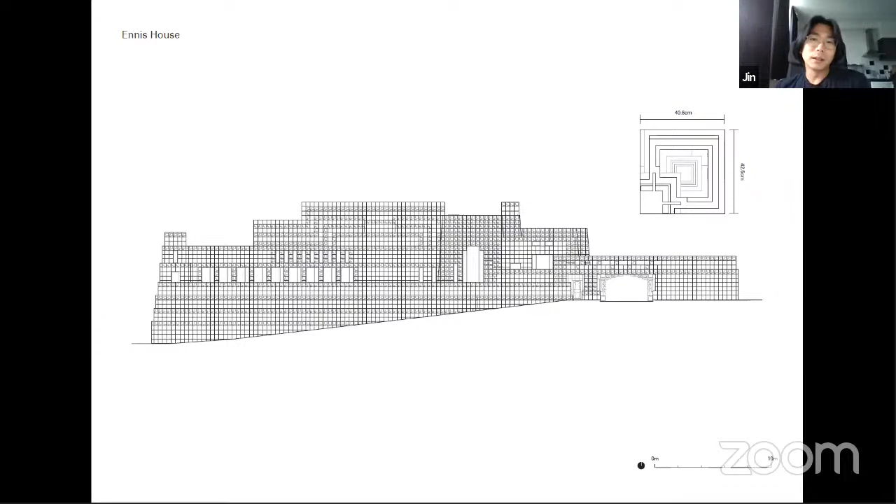To the architects, you might recognize this as a work by Frank Lloyd Wright. This has become a staple in the film industry, and what makes it so usable as a film site is this particular tile that is inspired by Mayan architecture, but it has this strange, ambiguous, yet unique identity to it that allows it to be

used in all sorts of films, from horror to representing a Hong Kong mansion or even the future. And to a film buff, you might recognize this space as the house from Blade Runner, which is what it's become most known for. And with the release of the new Blade Runner, this house was just recently sold for 15 million euros, the most that's ever been paid for a Frank Lloyd Wright building.

And even within this neighborhood that is in a very wealthy part of LA, it's far beyond the price of any surrounding buildings.

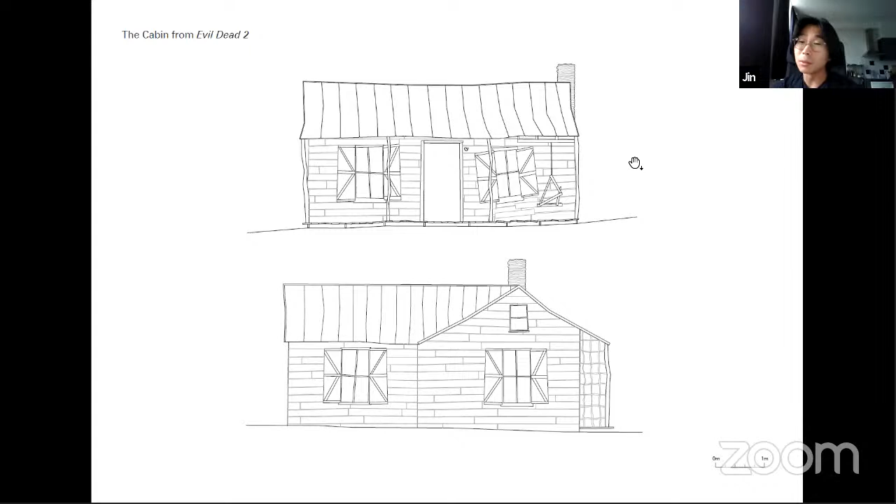And another way that film has influenced the type of buildings we see and their value is through the film The Evil Dead, which has led to similar types of buildings being preserved and put up on websites as film locations. So this leaning barn that really should just be taken down is being kept up and used as a film site in someone's backyard.

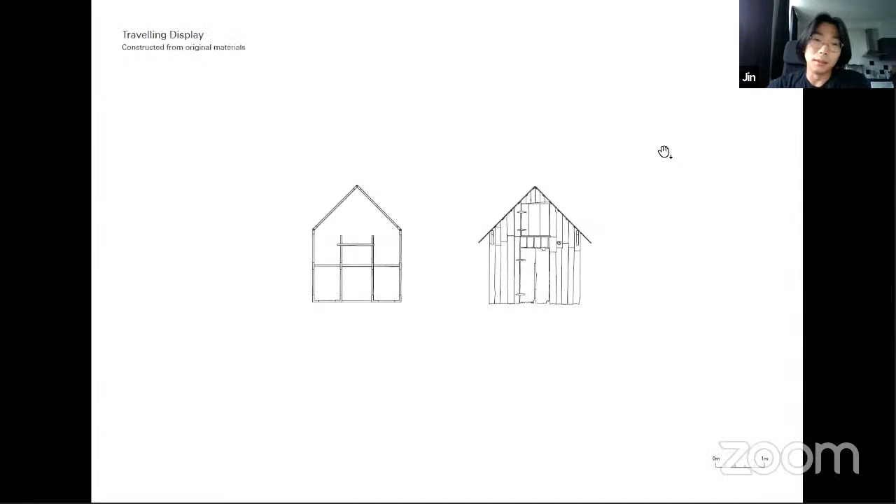Another particularly interesting part about this case is that even the building materials themselves gain value because of the film. So fans of this Evil Dead film started collecting them, and this is a traveling display that they put up at road shows and so on.

However, you can also buy the materials that were shown on film. This has led to 207 times the value of the average price of roofing, 67 times for the glass, and 46 times the price for a wood plank. If this continues with these kinds of numbers, I think soon everyone will be sourcing FSC materials for their building projects in the future.

Let's move on to the Vanishing Act.

So after moving on from the cinema, we're here to question the context. So what about the context? Because the value of real estate has been location, location, location since time immemorial. And it's that ethos that enforces a fear that a new building addition may actually destroy the location itself, or even worse, decrease its value. And therefore benefiting from the location, at the same time, runs an inherent risk.

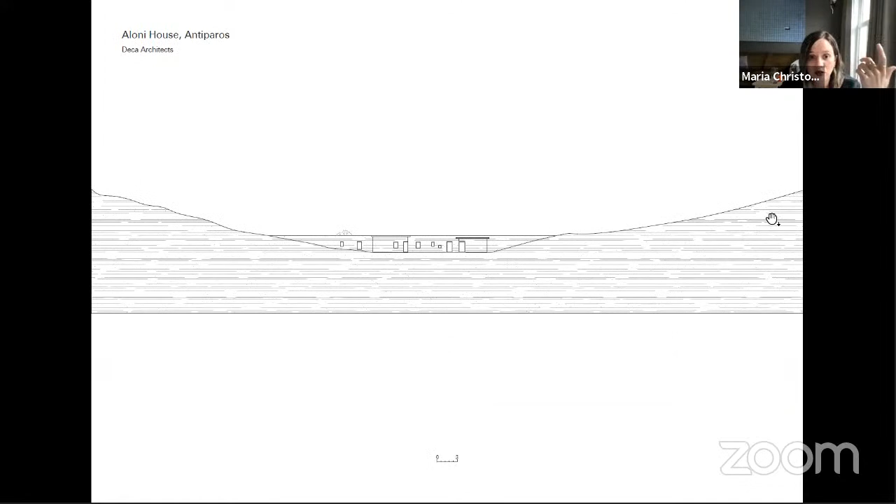Vanishing is just one way of relating to the context, but the value, especially in this case, is not determined by the object, nor by the concept, the context, but by this mutual dynamic relation that is being built up between them.

Here we can see the Aloni house in Antiparos, where it's a building built between two slopes. Actually, the interesting thing is this is part of the Oliaros development, and it was one of the first couple of houses built there. After that, around 10 years ago, the land values rose 3 to 5-fold.

And also on top of that, the government now awards bonuses to developers that top their buildings with earth in a similar way.

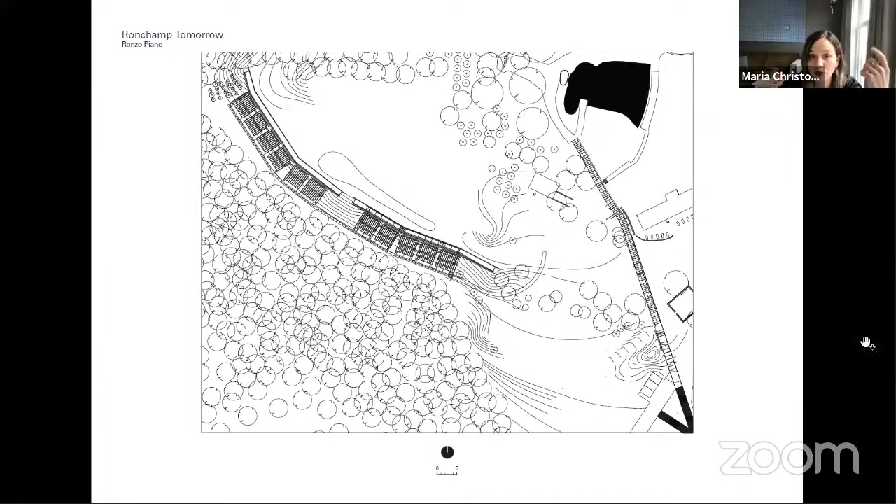Moving on to Ronchamp Tomorrow by Renzo Piano, where although it's only 300 feet away from Le Corbusier's church, Piano decided to cut into the slope so as not to intrude on the presence or setting of this iconic building that stands there.

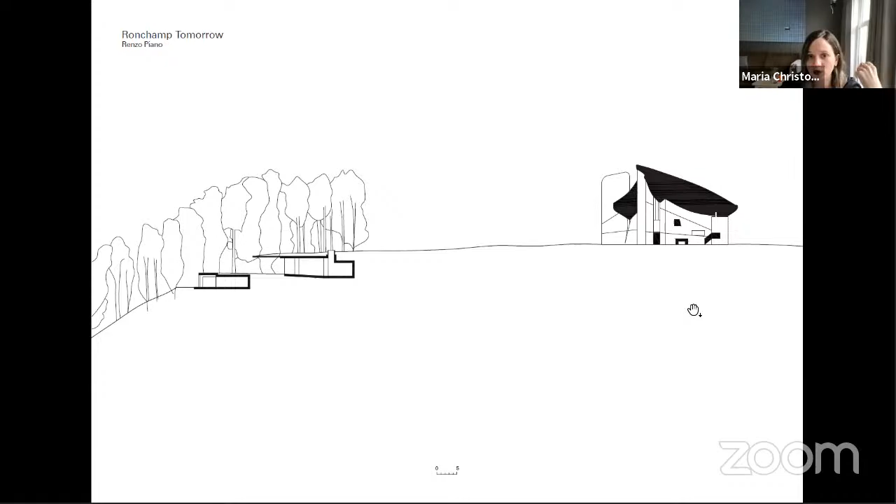The interesting thing about this building is that we have a new addition that camouflages itself into the landscape, as we can see here, but it's not to preserve the landscape per se. It's really to not interrupt the presence of this iconic element that already stands there.

Also, sometimes vanishing can also be an extractive art, where we keep deriving value out of something existing, even though sometimes we may not have anything to add to it.

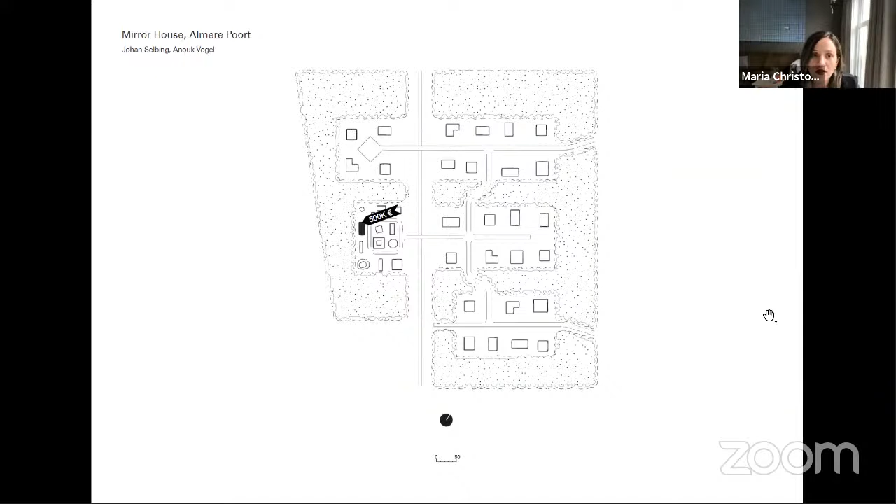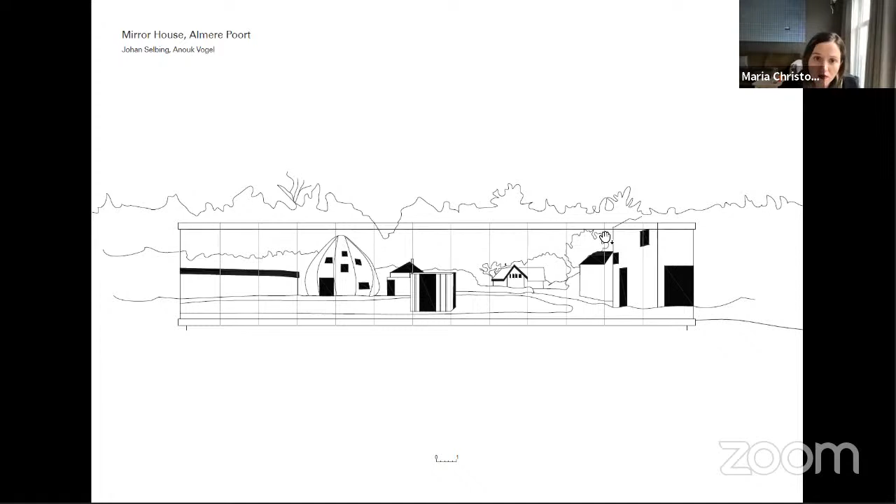The interesting thing about this building, which mirrors its surroundings, is that whereas the Almere Poort price per square meter is around 2,500 euros and the Amsterdam price is more than double, after this building the Almere Poort price has risen to almost 5,000, really close to the Amsterdam price per square meter, just by creating this relationship with the context.

The brief of the competition called for an individual house with a strong relation to its surroundings, really.

One can question when these buildings are trying to blend into the context, right on the boundary of imitating, disappearing, and actually generating a caricature. When is this fine line between disappearing and caricaturing crossed?

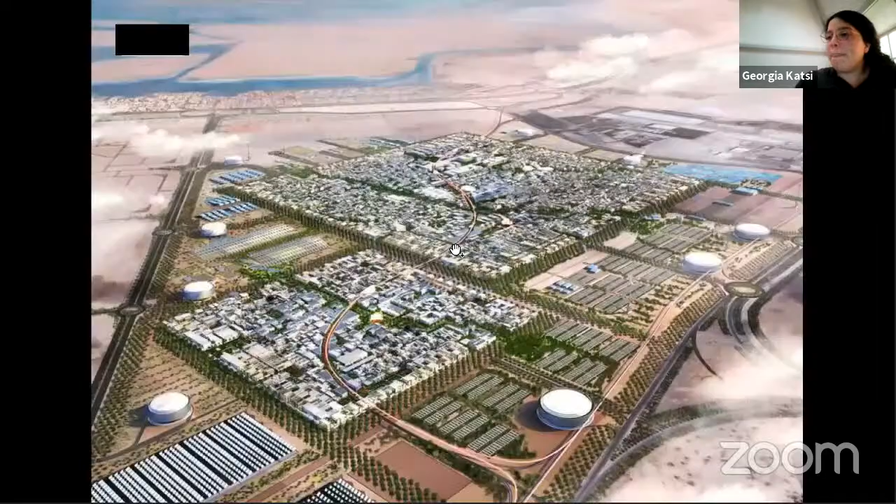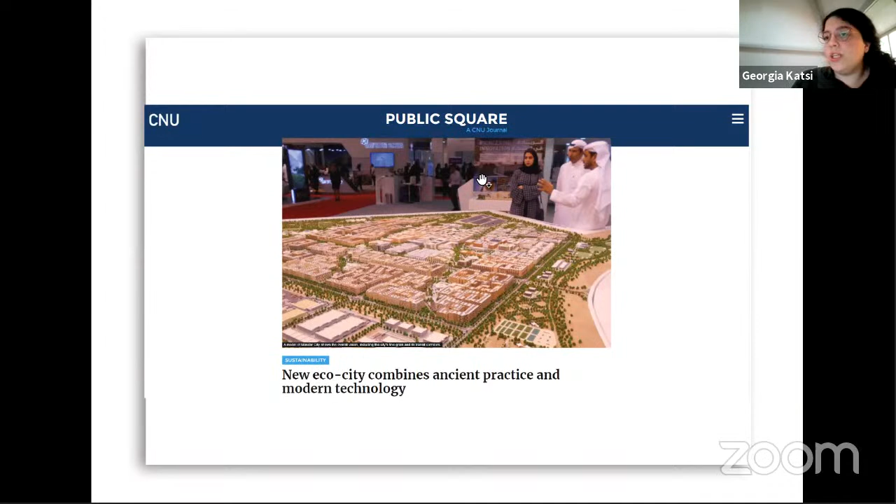Masdar City, a 6 square kilometer city for 50,000 people, designed by Foster, promised to be the new eco-city that combines ancient practice and modern technology, a rising star that sees growth rate accelerate.

King Abdullah Economic City in Saudi Arabia, a 181 square kilometer city for 1.7 million people, promised to be Saudi Arabia's new desert megacity, a new manufacturing and logistic hub for Saudi Arabia that generates a new era of prosperity.

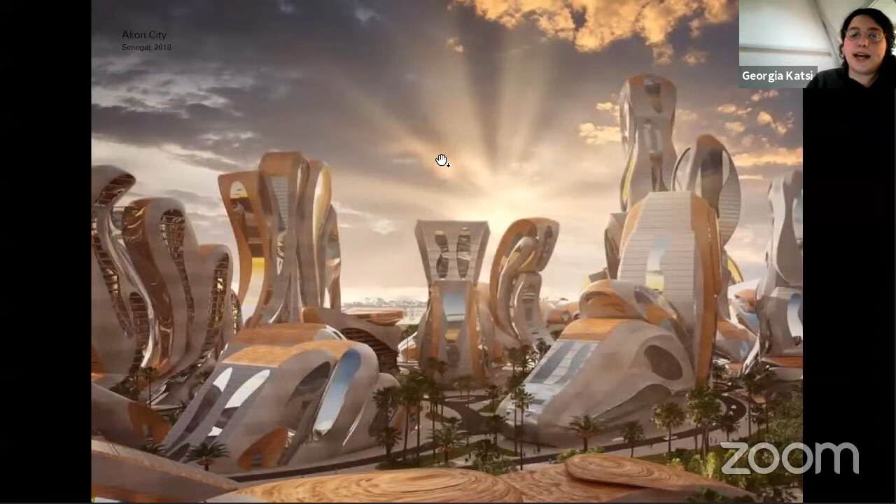Akon City, a coastal village 100 kilometers from the capital of Senegal, sponsored by the Senegalese singer Akon, promises to address the need for vibrant new community development. It was officially inaugurated in 2020, and promised to be powered by cryptocurrency, resembling the fictional African city in Marvel's hit movie Black Panther, a real-life Wakanda.

But where is the construction? Is construction really necessary, or can economic growth be seen, or can it be replaced by image and rumors? So now we are going to investigate 3 examples.

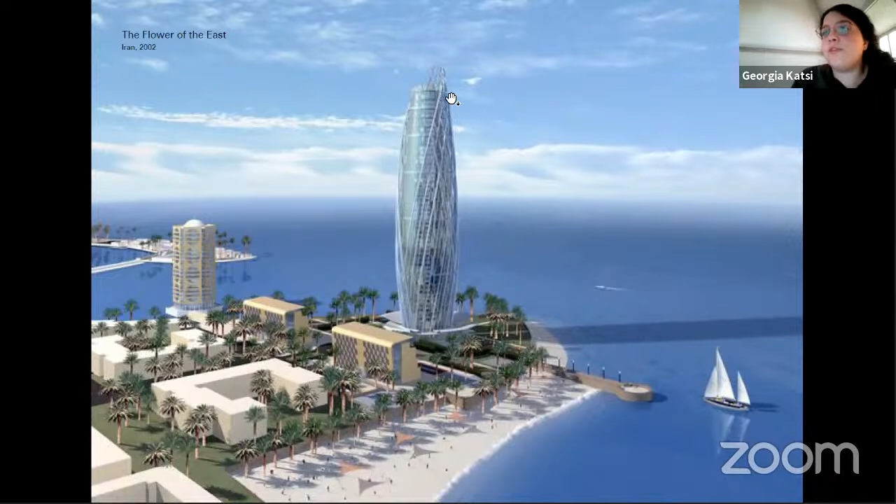The Flower of the East is the first one. It was a project launched in 2002, part of a large contract called Gulf Shark, which was to attract investment from foreign companies. Here, President Mohammad Khatami at the World Economic Forum in 2004 announced liberalizing investment regulations and foreign direct investments.

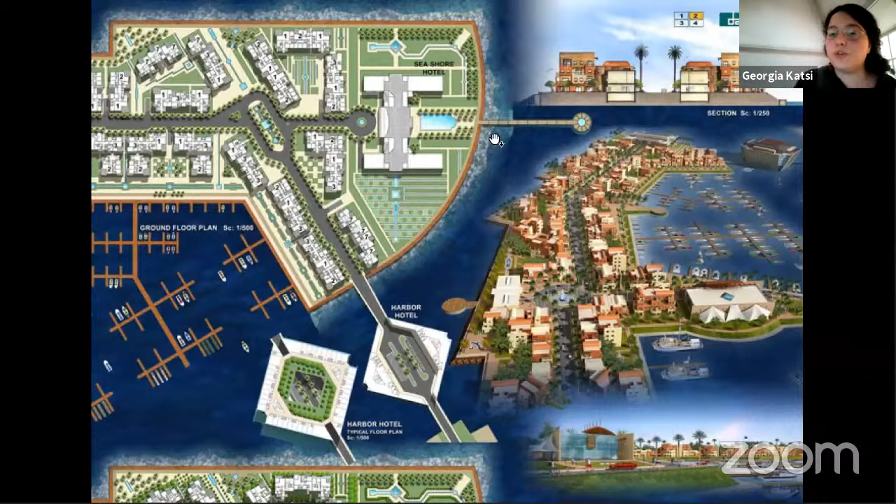The agreement comes with a German developer company that buys the land for 600,000 euros, and promises that the 2 million square meter land will attract 3.8 billion euros. The project was slated to include 3 hotels, 3 residential areas, villas and apartment complexes, coffee shops, showrooms, stores, sport facilities, and a marina. The centerpiece of the project is a hotel in the shape of a flower, a combination of Persian and modern architecture.

Although the project was cancelled in 2007, the news reported the same year that it had already attracted 3.8 billion euros. And in 2011, we see that the second 7-star hotel is ready to open its doors in Iran. But in reality, the land remains empty.

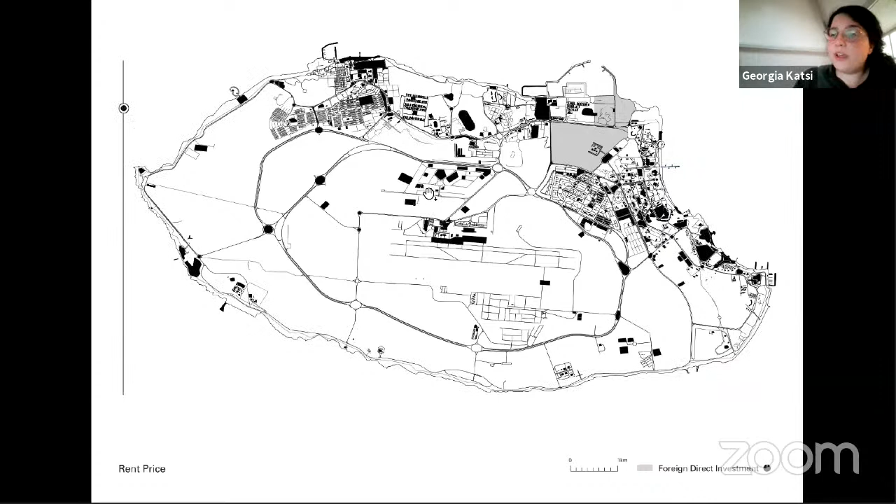And although it remains untouched, we see that the surroundings are being developed, and in particular constructed and delineated the gray zone, which is the development. The rent goes from 65 euros in 2003 to reach 190 euros.

Then we have the Eco City in Dongtan, close to Shanghai, to house 500,000 people and suggest a city with hopes of being completely carbon neutral. In 2005, the Shanghai Industrial Investment Corporation hired a global design engineer and business consultant company.

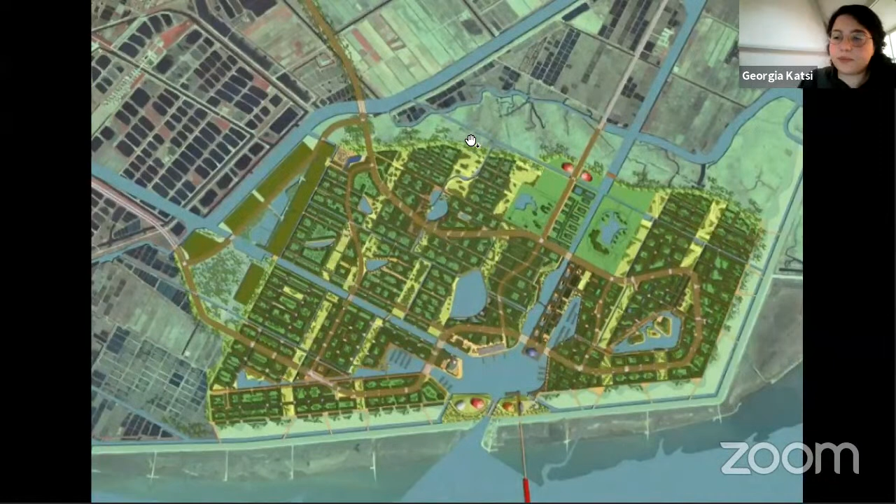Dongtan will be energy self-sufficient with all its transport, residential and commercial buildings powered by a combination of wind, sun and other renewable energy sources. Here we see the signing renders. It's going to be the first eco-city that China builds, a utopia of premature birth.

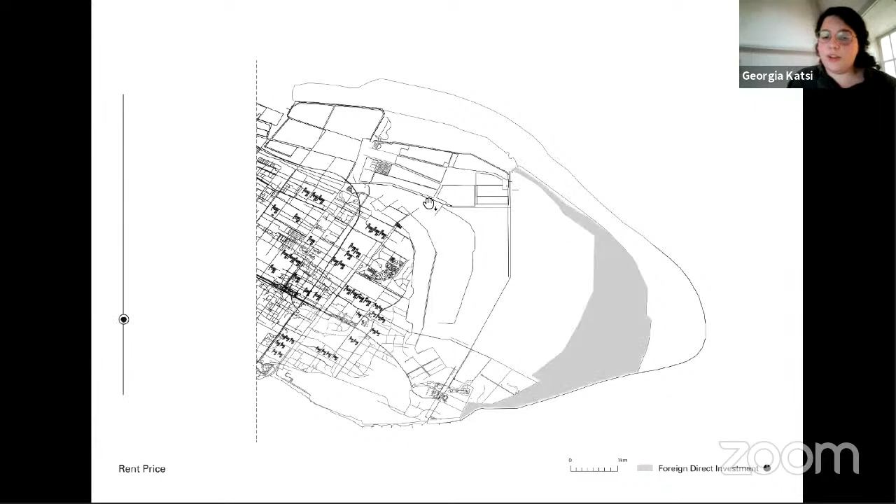The land in the beginning was mainly residential, and the rent price was around 32 euros on average. And although there were questions if Dongtan eco-city was ever meant to be built, or if it is just another example of greenwashing, the plot remains. And although the plot remains untouchable again, the development of the surroundings was profound.

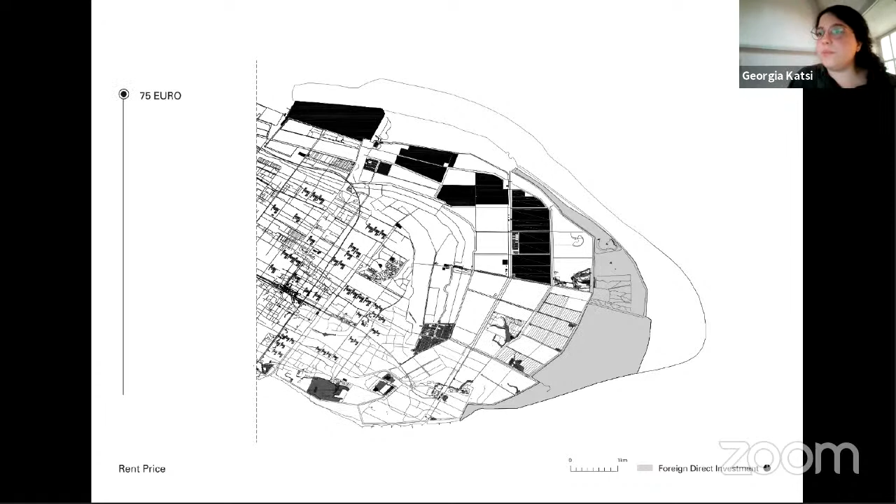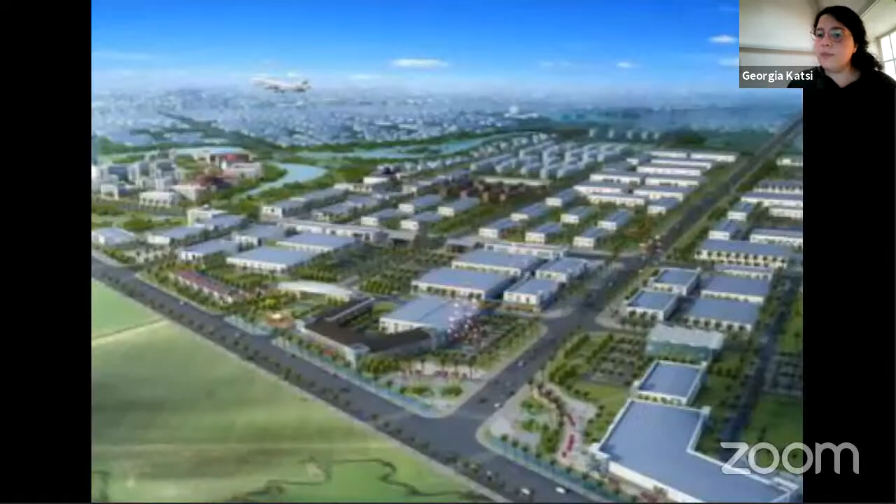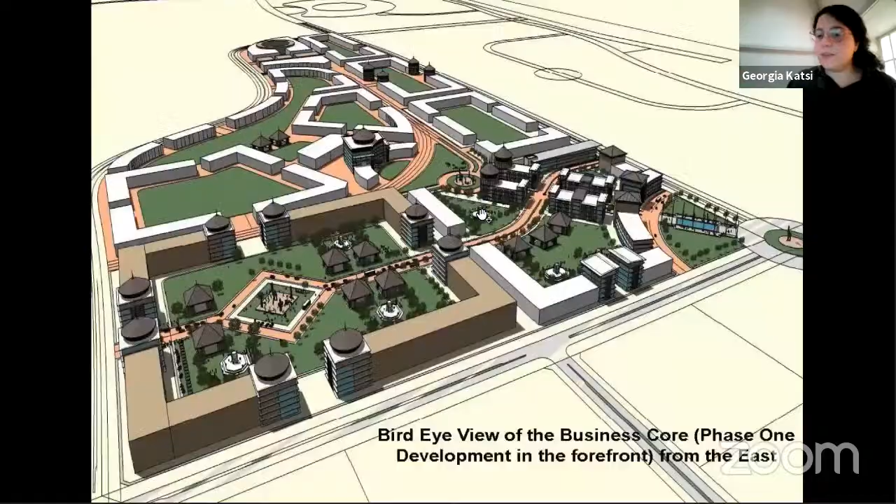The project was slated to include industrial zones, residential zones, commercial business core, and open spaces. Here we see a bird's eye view of the business core. And the news again praised that already in 2019, it covered all the investment it was supposed to.

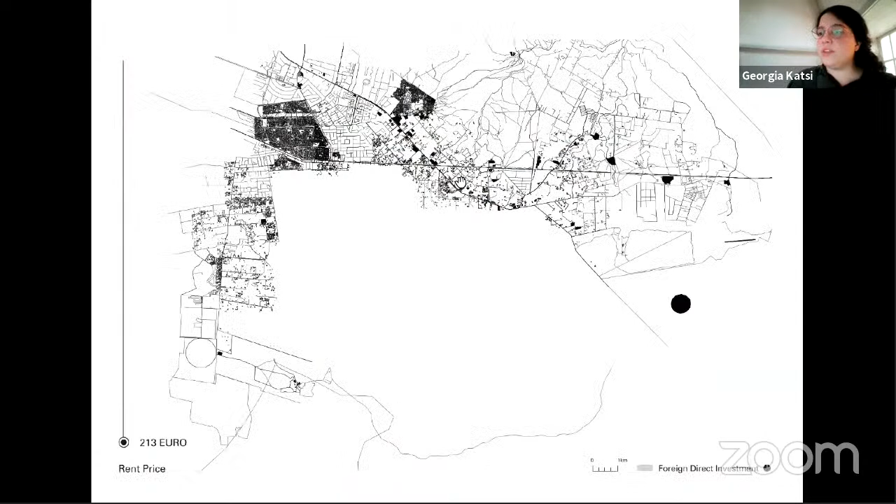And we see millions of tweets. However, the land remains untouchable, and again, we see the surroundings being developed.

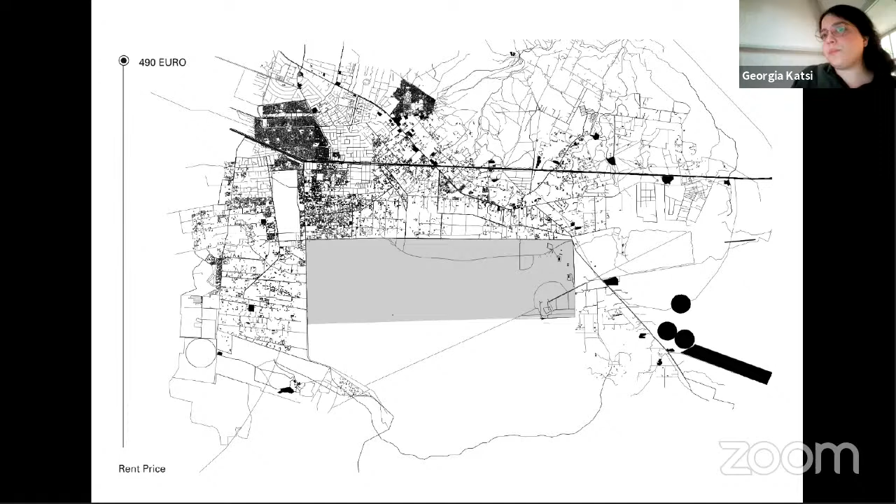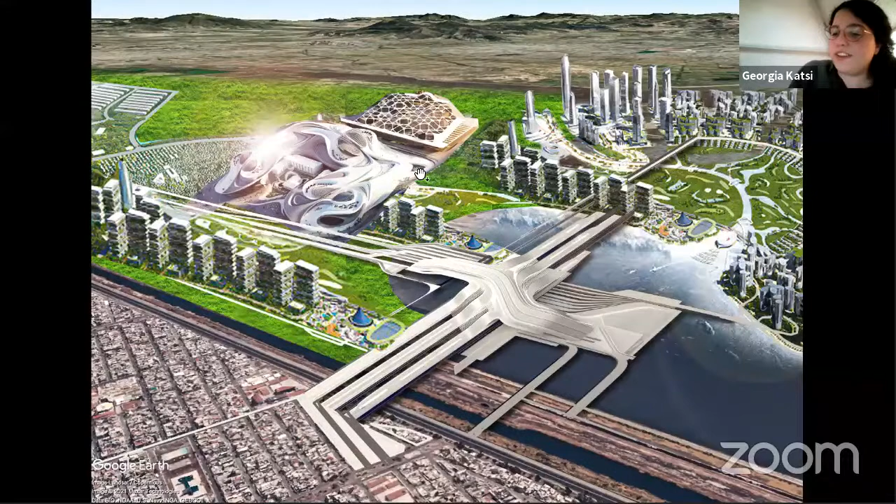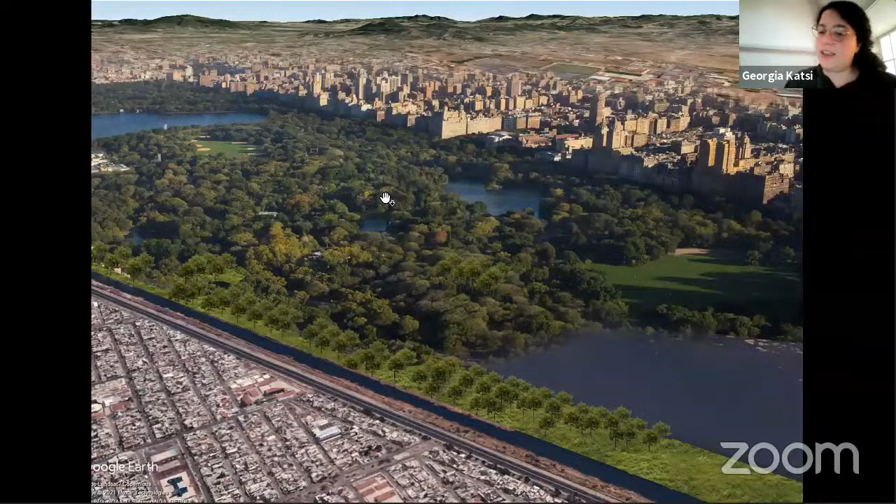And now the question is, what if these rumors could construct public spaces? So what if in Mexico, for example, in the Texcoco airport, we propose a multi-facility zone which communicates the dream of development in a shining image, but only in order to develop a huge park that is built only in the surroundings.

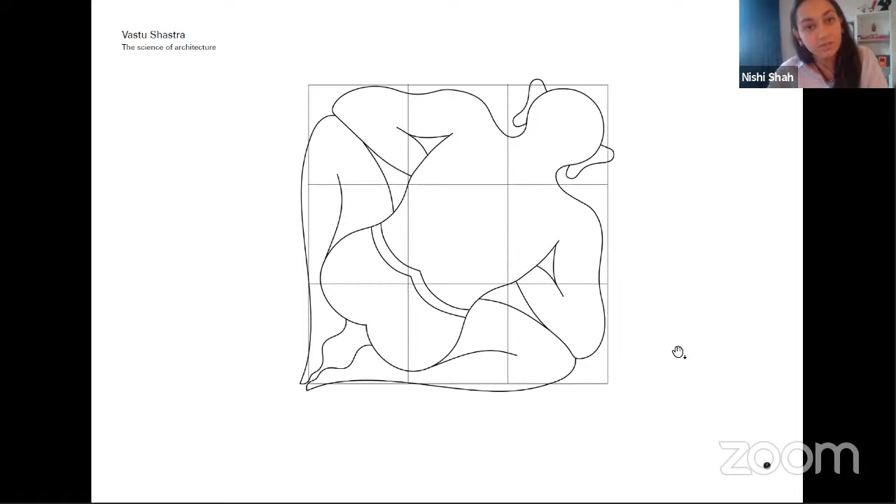Vastu Shastra is an ancient Indian system of architecture based on spatial geometry and directional alignments derived from a 9-square grid. The human embodiment in the diagram represents a cosmic man, and the design is developed from the flow of positive and negative energies, and was traditionally used for Hindu temples.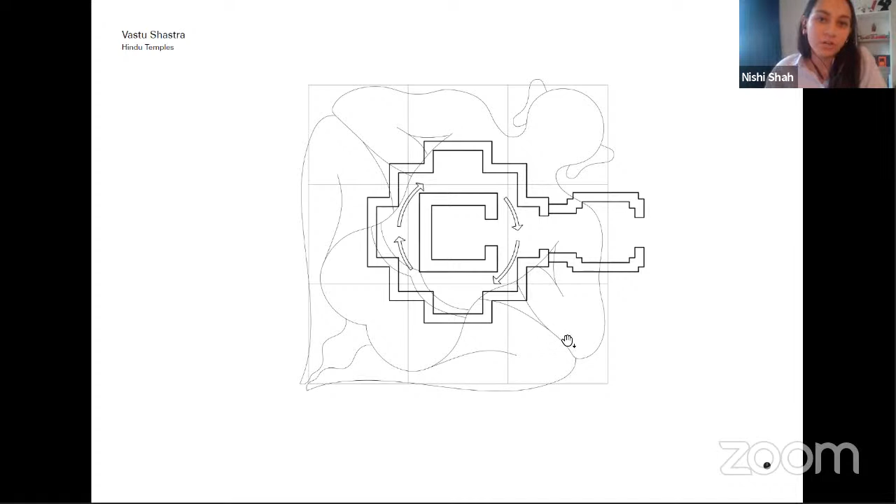The shape of Vastu is always orthogonal and remains a square, as it is believed to be the most perfect form of Indian architecture.

Modern adaptations led to the planned city of India, Jaipur, which was the first city developed completely on the logic of Vastu Shastra, where the street network and public squares are connected with each other, addressing that all things in the universe are always connected.

Similarly, modern era projects by architects such as Charles Correa and Le Corbusier have also incorporated modern architecture with the theories of Vastu Shastra.

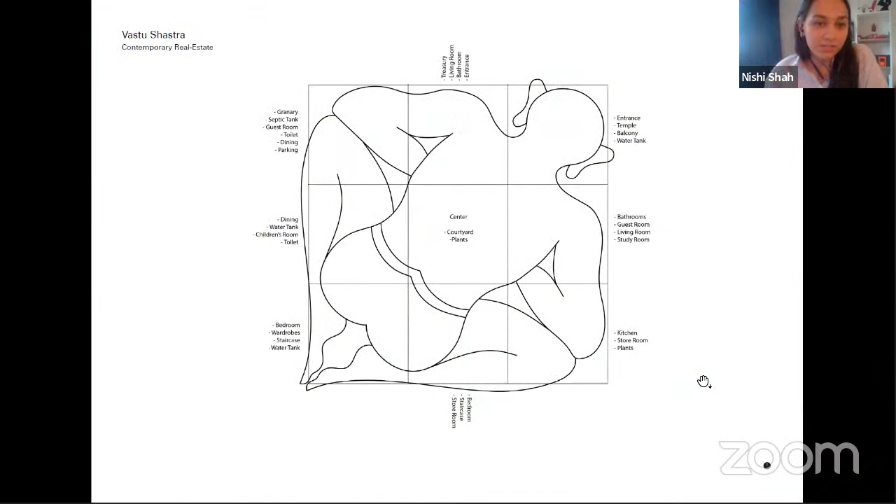Today, Vastu Shastra's divinity can even be incorporated in your homes. All you need to do is follow a few simple steps to Vastify your properties.

Step 1 is to find a property which has a street network towards the north, east, or northeast direction, as that's considered to be the most auspicious space. The slope in the property should always be sloping from the northeast to the southwest.

Considered to be the most important factor in a building, the entrance of the property should always be located in the northeast, as it represents the archway to prosperity. Water bodies should always be in the north, and the flow of water towards the east brings more financial benefits to the family.

The property dimensions should always follow a length to breadth ratio less than 1:2. Future expansion zones are only possible in the north and northeastern directions. The southwest should always be shaded by trees, as Vastu Shastra strongly believes in integrating with nature. And as mentioned earlier, it should always be orthogonal, so curves or angles are not good for Vastu.

The layout inside the building is also completely derived from Vastu, and even the colors are developed from the diagram of the Vastu Mandala. So these are the 11 steps that form the basic layout of a Vastu compliant property.

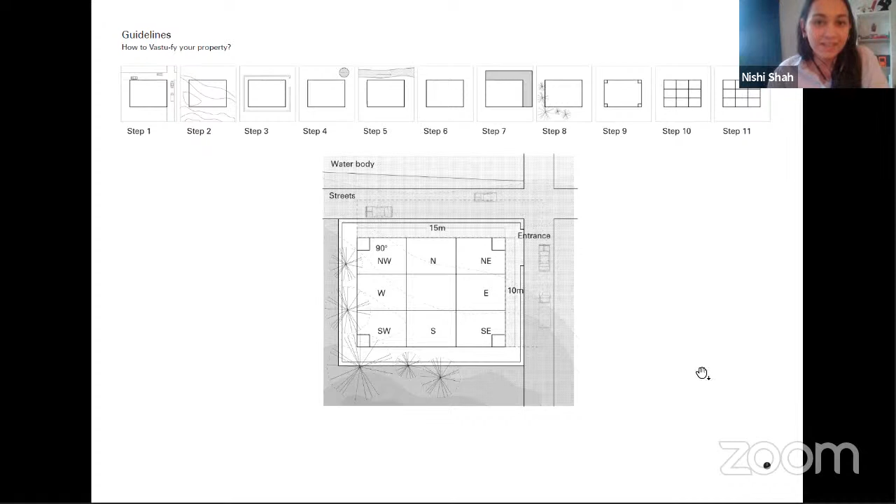Vastu provides the opportunity to have a plethora of examples, and it increases the life conditions of a family and solves the problems that these families have.

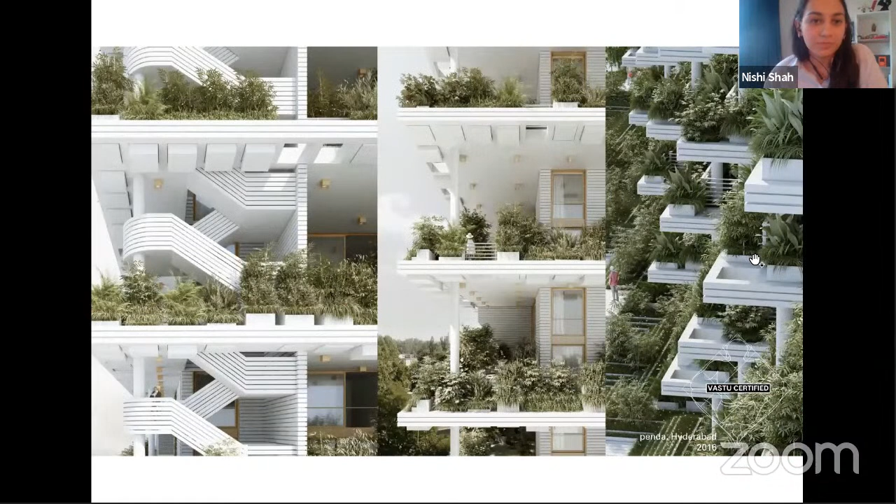Architects like Chris Precht and Norman Foster have designed Vastu compliant buildings in high rises, but to have a house designed by Khosla Architects or Matharu Architects, personally derived from your own horoscope, brings even more success in your lives.

It is also easy to use the laws of Vastu Shastra for all scales in architecture, from a unit level to high rises, or even a neighborhood scale. And Vastu Shastra is not limited by any design forms.

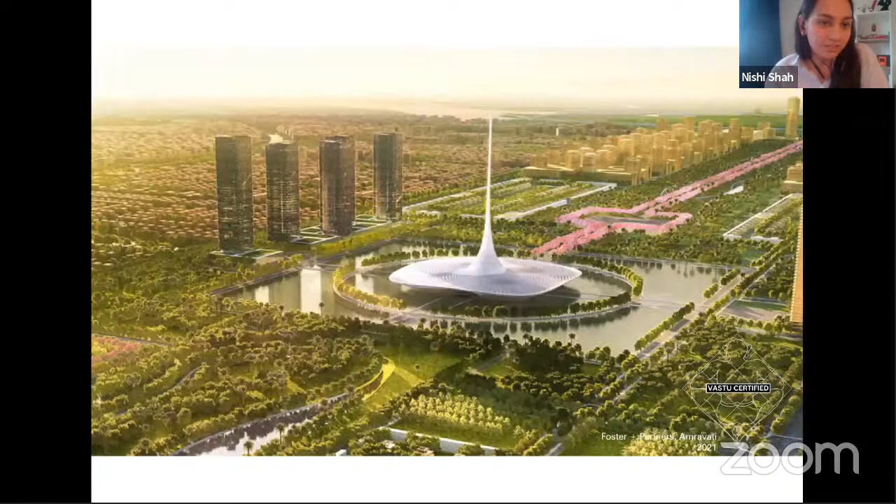The phenomena of Vastu Shastra today has become increasingly popular and is the new trend, and has become an important filter in real estate websites and property advertisements.

Architects and Vastu experts today are studied and well versed in the laws of Vastu because they give consultancy for their clients. They study their horoscopes and provide and modify layouts based on the horoscopes of their clients.

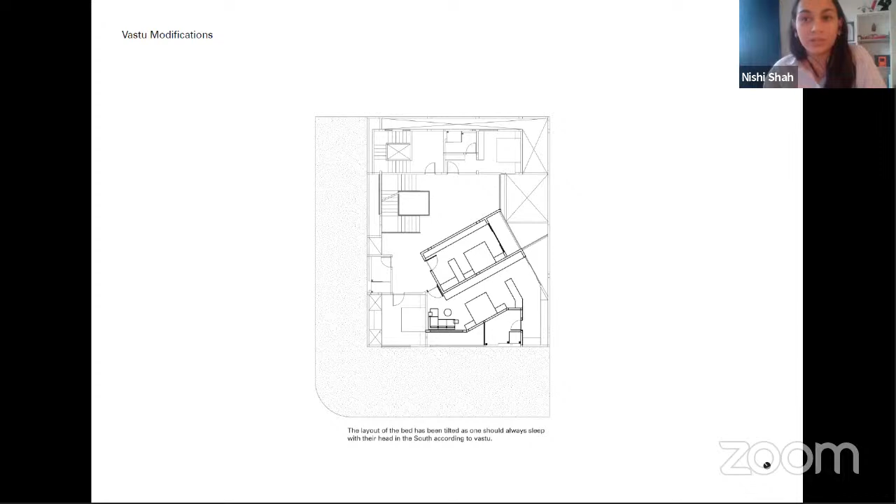It is very simple to design a new house, but it's even simpler to modify an existing house. All you need to do is shift or rotate a particular bedroom so that you always sleep with your head facing south, or just tilt the entrance porch so that the entrance arch faces the northeast direction, bringing an auspicious life.

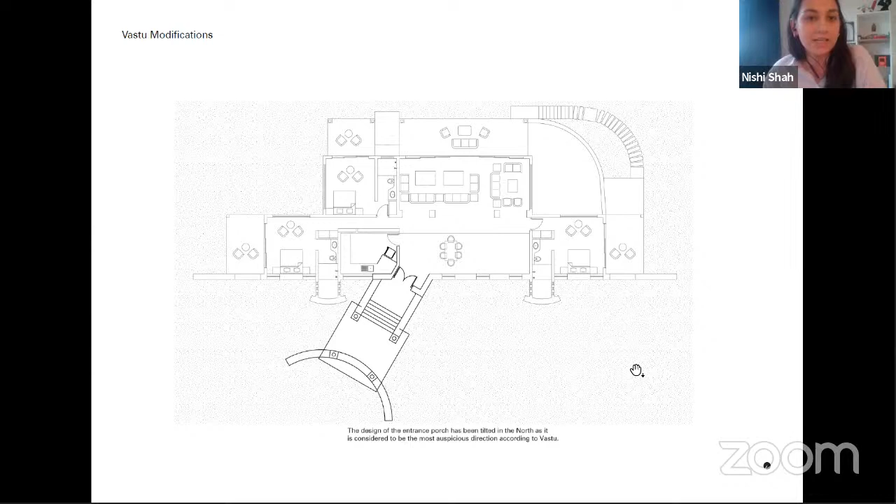Do you have a property that is currently facing maintenance issues or is abandoned and not inhabitable? All you need to do is consult a Vastu consultant, and with a nominal fee of 170 euros per session, he can provide modifications to your house and make it a much better place for living.

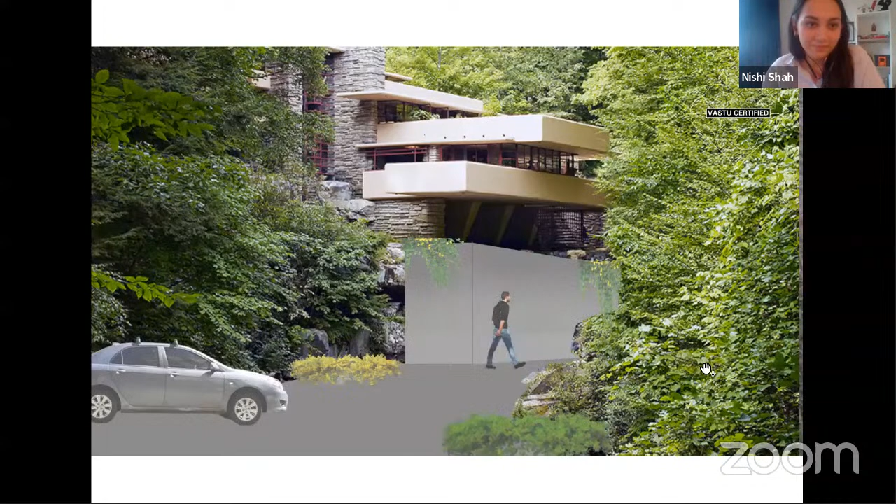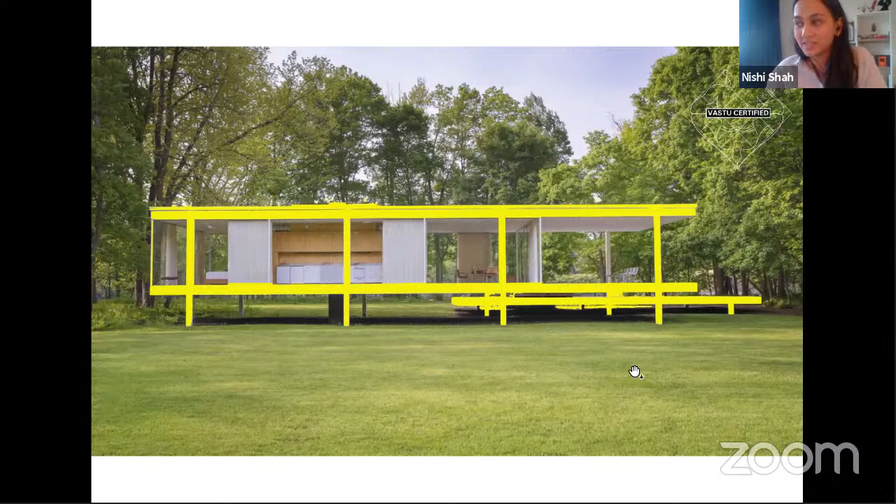Vastu is the future to mitigate all problems in architecture by simply believing in this miracle of the ancient science of building. The financial logic of architecture, subjugated by this real estate mutation, manifests completely on these beliefs, in turn shaping the architecture of contemporary India. Thank you.

And from India, we go to Denmark, where another type of wisdom stems from. I'll be presenting together with Ryan.

When Copenhagen announced it would pedestrianize their shopping street Strøget, they received criticism from motorists and business owners, claiming that the decline of traffic would be reflected in their revenue. Less traffic is less profit was their idea. They said, 'We are Danes, not Italians,' while creating a traffic jam in the streets as part of the protests.

At the same time, the architect Jan Gehl started studying Strøget and publishing about it. Slowly this model expanded throughout Copenhagen, using Nyhavn, and it expanded even to become a kind of model of pedestrianization over the whole world.

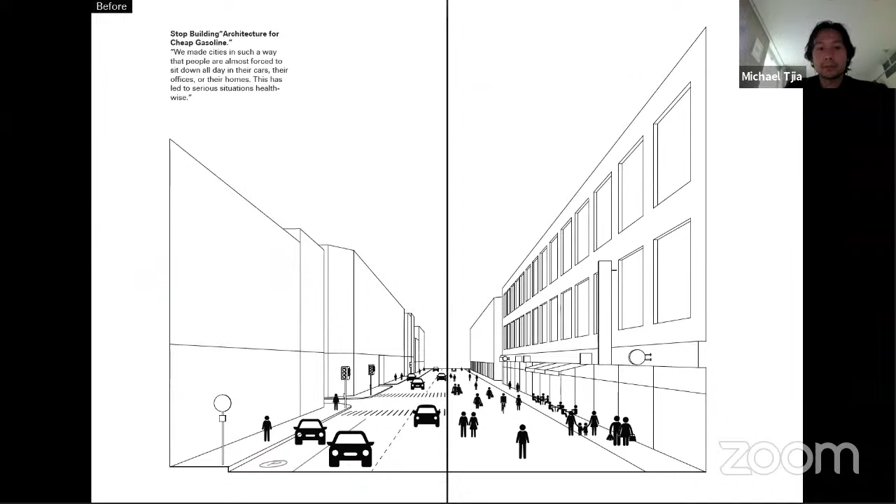How is Jan Gehl selling this? Studying this Strøget model and trying to give his strategy to promote this equitable and healthy city.

His strategy, as he says in his book, is to stop building architecture for cheap gasoline. To him, the car-oriented street is only beneficial for the auto industry. Therefore, we need to ban cars from the street and give more space for people to walk.

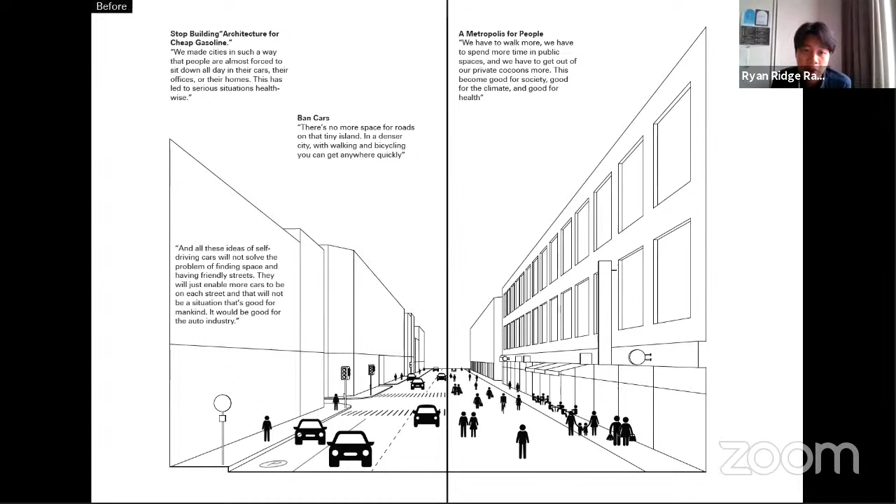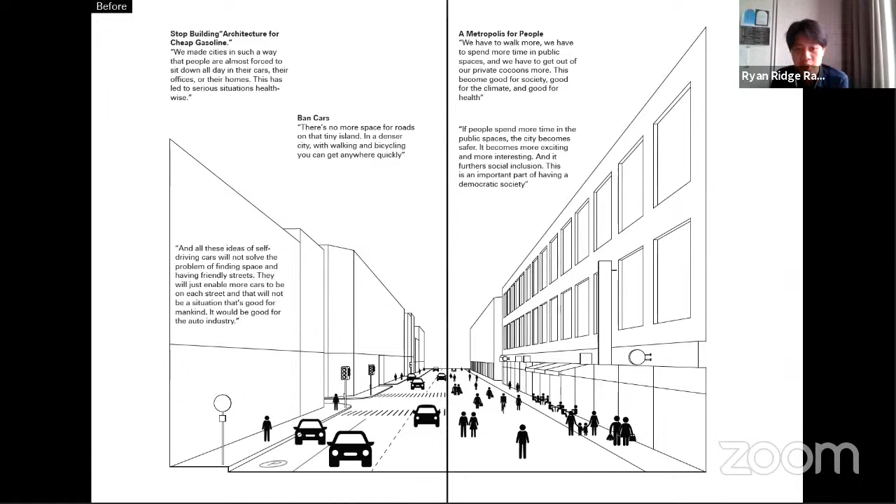This also promotes better climate, good for society, good for climate, and good for health. If people spend more time in public space, the public space becomes safer and more interesting, and it gives more social inclusion and a more democratic society.

Since the last decade, the city designed for the human scale has continuously been mentioned in all these livability rankings, such as those of The Economist, Monocle, and Mercer. But the real acknowledgement comes from Jan Gehl himself, stating that the Danes have become more Italian than the Italians.

So, of course, this also has its effect in real estate value. For instance, if we studied 3 types of streets: regular streets, shopping streets near a pedestrianized zone, and fully pedestrianized shopping streets, which are worth up to 16 times more than the equivalent type of property in a very different type of area. So what does this look like on the streets?

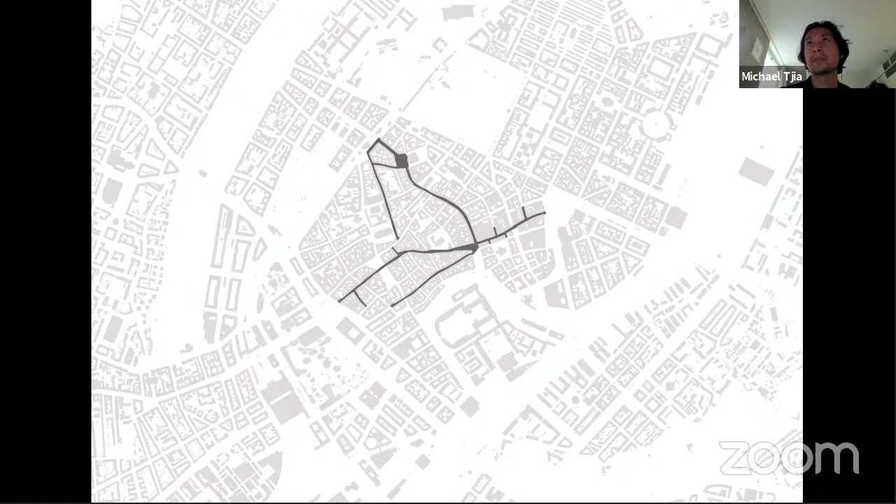Just in the context of Copenhagen, this includes the Strøget shopping area amidst, let's say, the historic context. And this is where it gets really interesting, where you can see the black flag price tags are the properties directly on the pedestrianized shopping street, which have much higher values than we showed before.

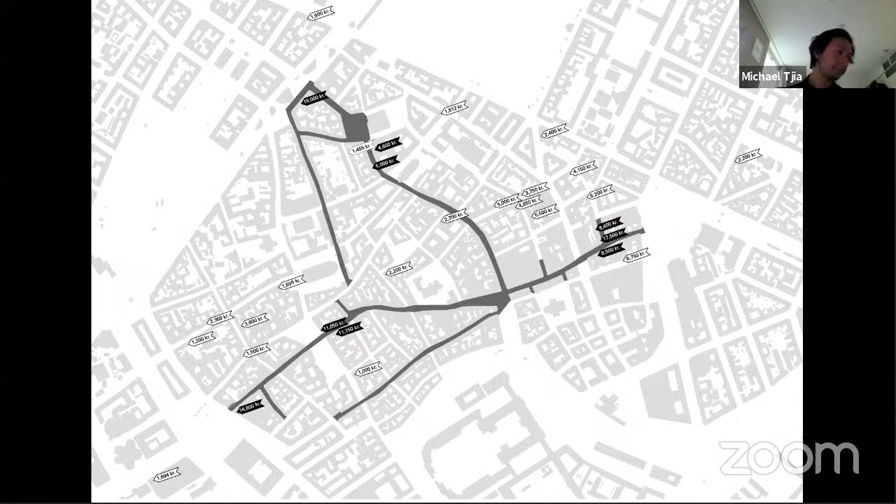Before we saw Jan Gehl's strategy to get cars out of the city; now we try to look at this from the real estate value perspective.

So the car-oriented street needs parking spots for the customer to get inside the store. It also has narrow sidewalks for pedestrians, meaning less pedestrian traffic for the store. And you cannot maneuver easily in this neighborhood because you need to wait for cars to pass, and the cars cannot turn around as freely as pedestrians.

And also, you need to spend valuable street-level area to provide for parking and entrance to parking.

If the street was pedestrianized, the street front can also be used for terrace seating — in Strøget this is an increase of 80% in outdoor cafe seating. And then the ground plane will become active. This is also one of Jan Gehl's main strategies, to activate the ground level plane, which gives 100% higher value in rent.

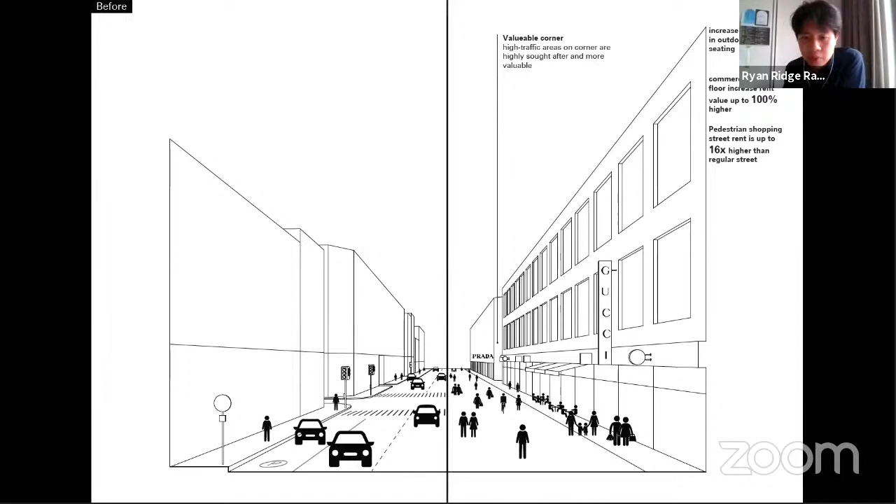And also the corners — most streets will have a high-branded store on the corner. And when the street is pedestrianized, it sees up to 16x higher rent value.

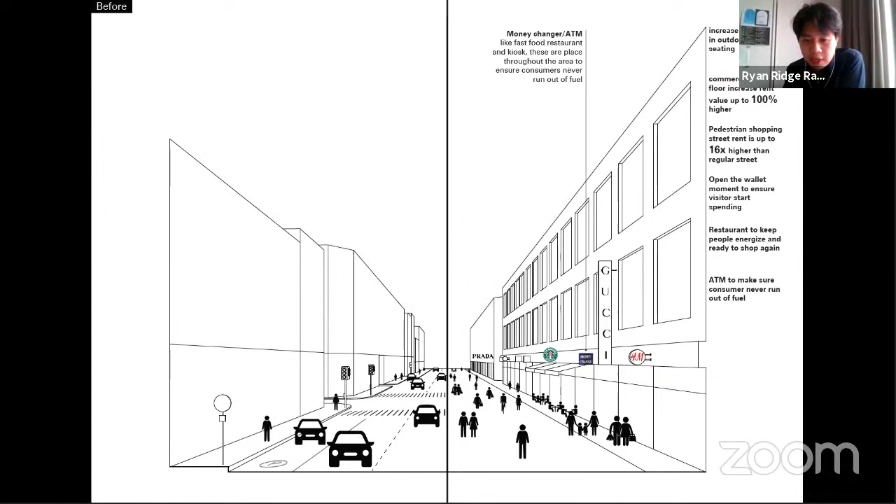There's also international chain stores coming to the street, including affordable ones, to make sure people who come there start opening their wallets. Also restaurants to keep people energized and ready to shop again. And you could easily find money changers or ATMs in Strøget, along with fast food restaurants, so the customer never runs out of fuel.

Going back to the quote from the very beginning: a pedestrianized city with piazzas and cafes is something which the Danes previously only knew from their holidays in Italy. While in fact, these places have become very much unlivable due to tourism, some of them. At the same time, these cities are also not topping the rankings of any livability index. So what could they perhaps learn from the Danes?

Yes, you would think if it's all for tourism, you could also bring pedestrianization into the city to make it more livable again and bring the price down — and invite fewer cars into the city.

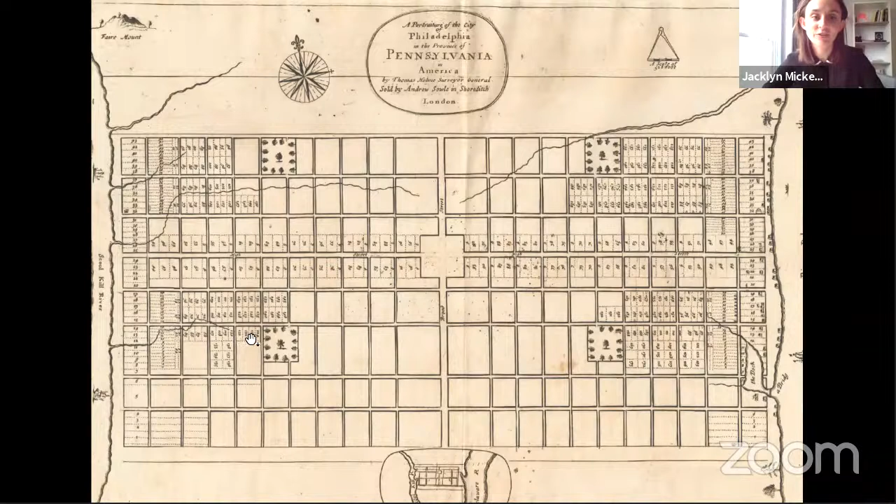This is the original plan that William Penn designed for Philadelphia, where you can see the gridded city along with the 4 squares that form the void infrastructure.

And this is what Philadelphia currently looks like today, with the 4 voids being majorly the only voids within the city.

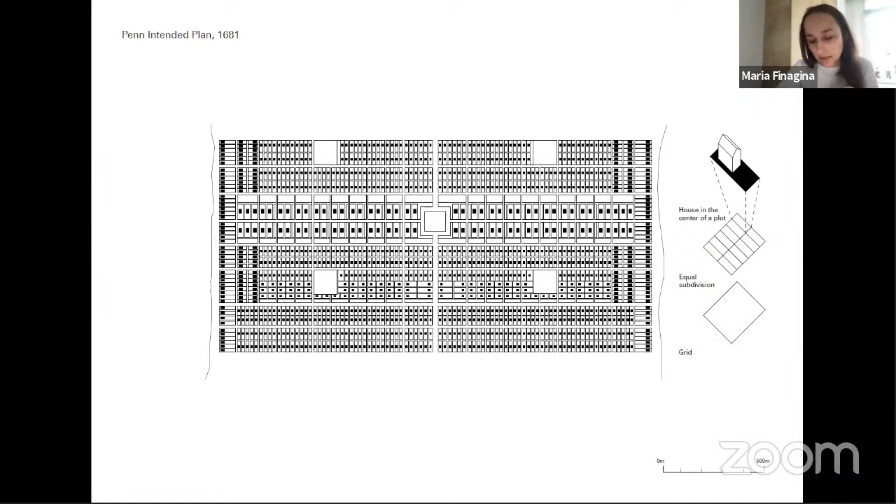So we'll reveal the main points of development of the city, looking at the financial aspects and taking into account the voids. The initial plan was an equal grid with equal subdivision of plots, with buildings inside the plots in the middle. When the city started to develop according to this grid, it began filling from the east part first, as that was the access to the city, where the main port on the Delaware River was located.

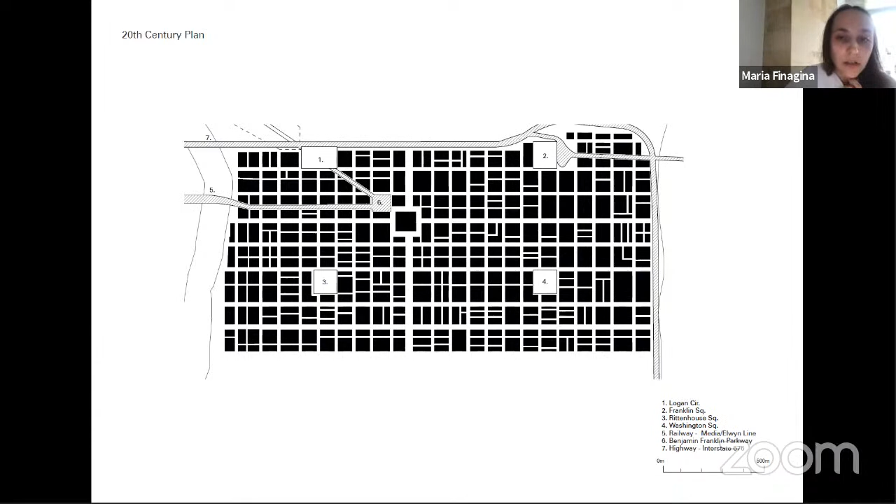Then, as part of the beautification of the American city, the diagonal road was introduced. And later the highways were implemented on the north and east of the city as part of the interstate highway system.

So this is the current plan, which also developed under the speculation of real estate and the subdivision of the plots. The third dimension of the city also plays an important role here, and Jacklyn will tell about this.

When City Hall was constructed in 1894, the gentleman's agreement took place in Philadelphia, causing no building to be higher than the statue on top of the building, which was a Quaker practice of agreement. It wasn't actually part of their zoning code. Then in 1987, they broke the height restriction, causing the 4 squares to rise in value even more and have more variation between them.

So here you can see the beginning nature of the 4 squares, and how Logan Circle, previously Logan Square, transformed into geometry based on the museums, and Washington Square became a commercial area.

And currently Franklin Square is the least valuable of the 4 squares because of the highway, while Rittenhouse is the most expensive because of the shopping areas, causing high residential prices and rent.

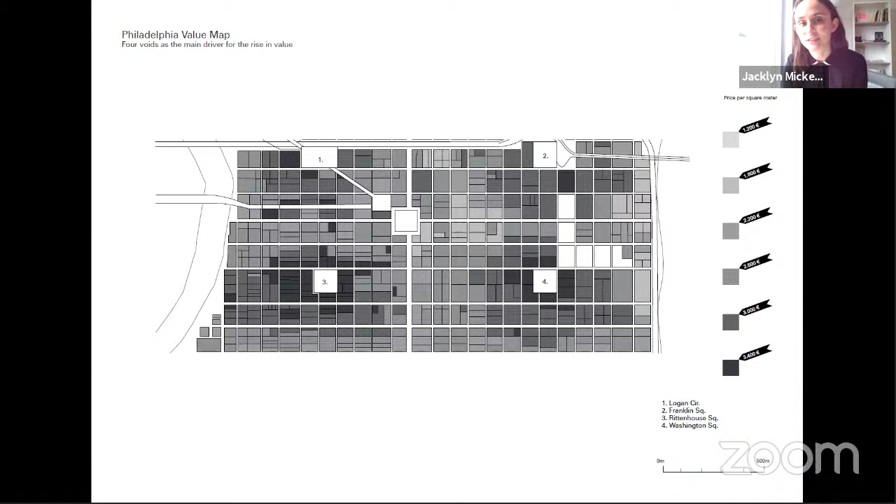With 5 points of architecture that are based on the Quakers' rules. For example, the Green Garden rule is to always have the house in the middle of the plot, so the distance between houses is filled equally with green zones.

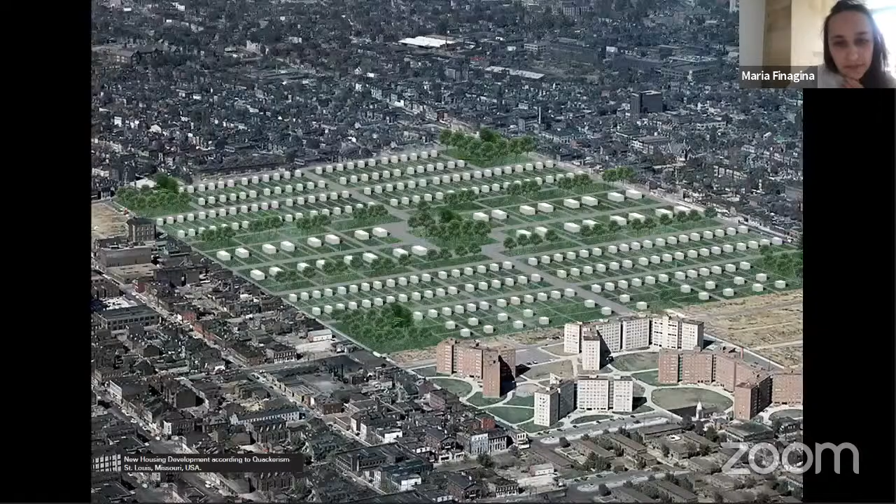So we propose a strategy of Quakerism with the equal grid, equal subdivision, and green voids as an approach to change the value cost of the former demolished or abandoned areas.

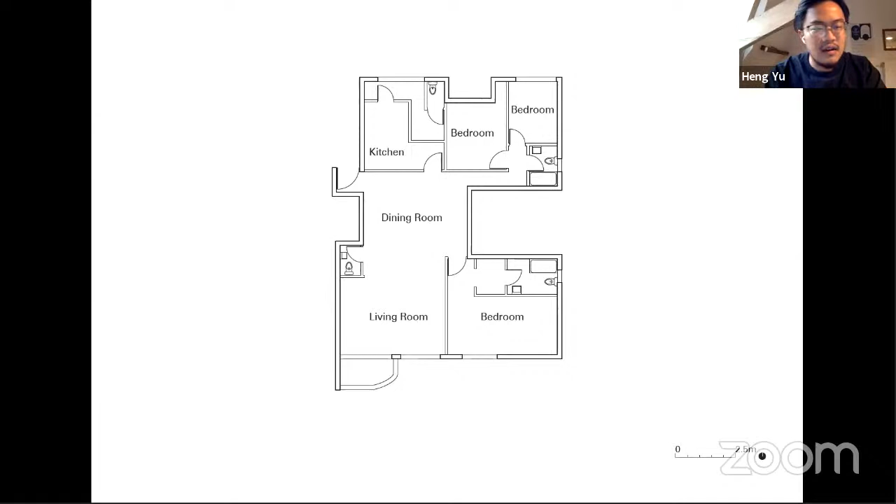However, due to the smaller floor area per unit, each flat is still more affordable to normal people, like migrant workers who move to Hong Kong to find a job. Thus, the revenue of properties has successfully increased without any substantial improvement of the space itself.

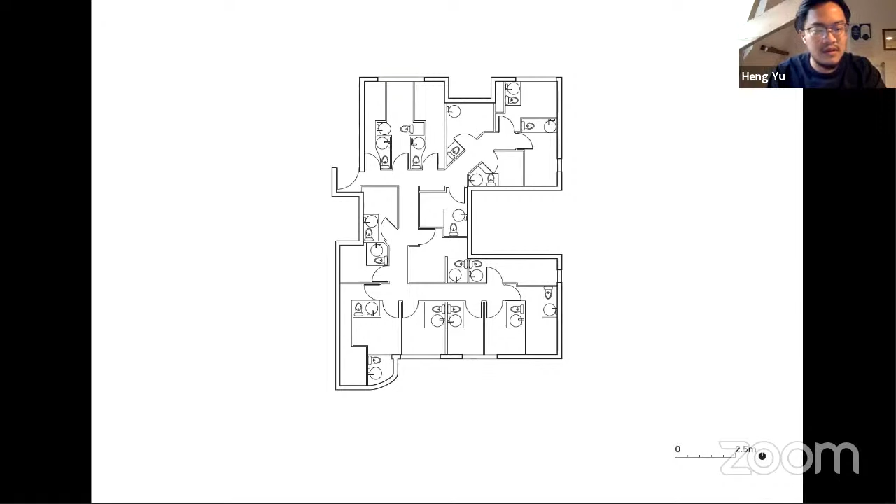Then we move to one of the most extreme examples, the Chungking Mansions. Its peculiarity in subdivided flats can be observed in the before and after of the subdivisions.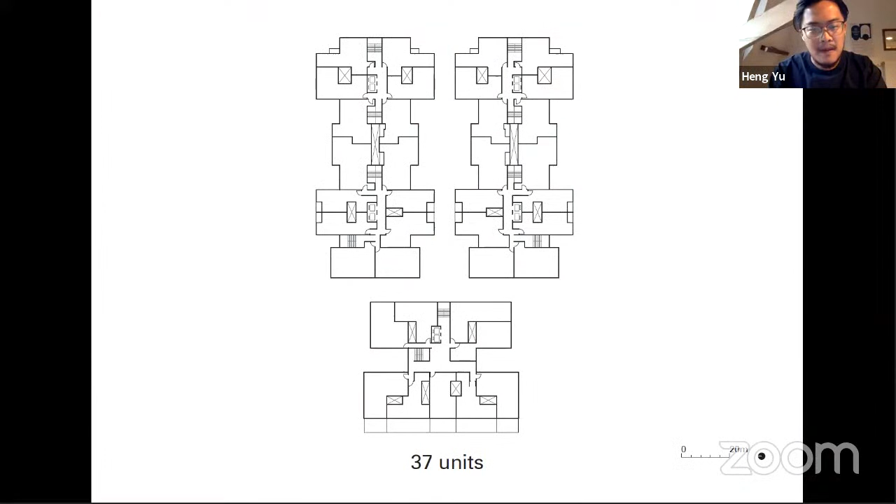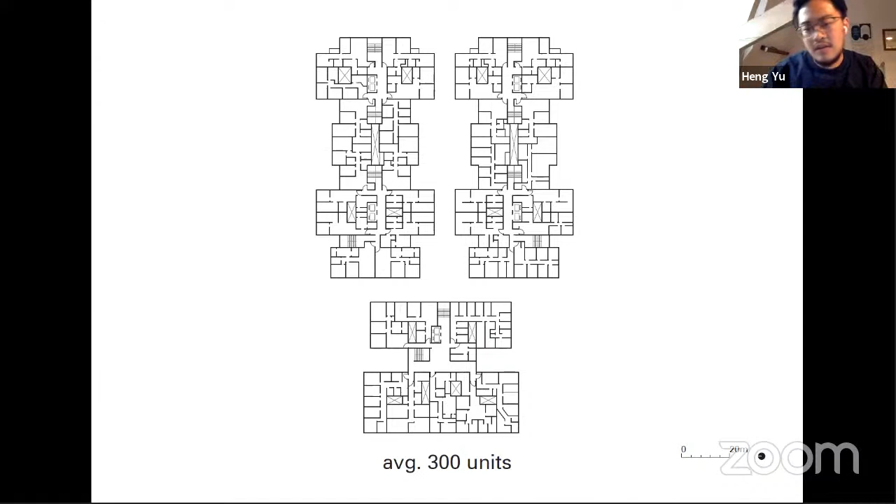So this is the floor plan that was designed for the original use, with 37 units per floor. And this is the units after subdivision, averaging almost 300 units per floor.

Then here we pick one as an example to look into. So this is the very original design of the housing unit D8, which cost around 9,500 Hong Kong dollars for this apartment for a four-person household.

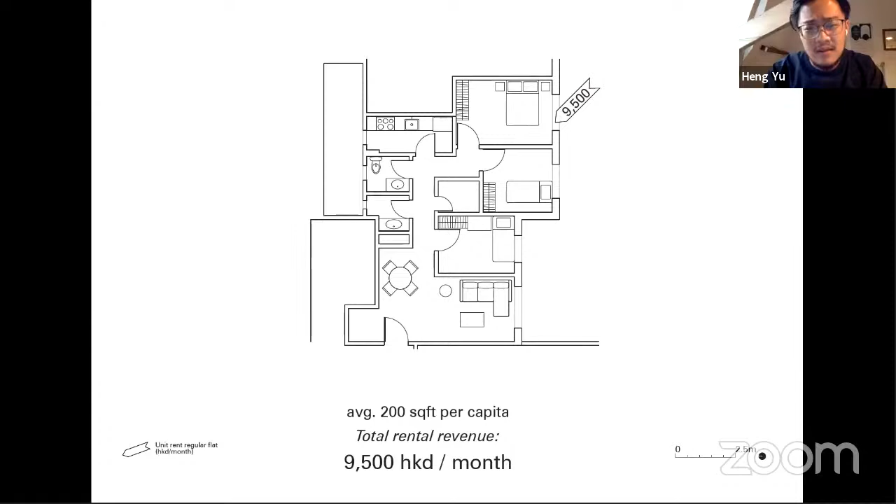But it got subdivided into 8 rooms, each significantly cheaper than the original one, but combined all together, that already increased the rent revenue by more than 50%.

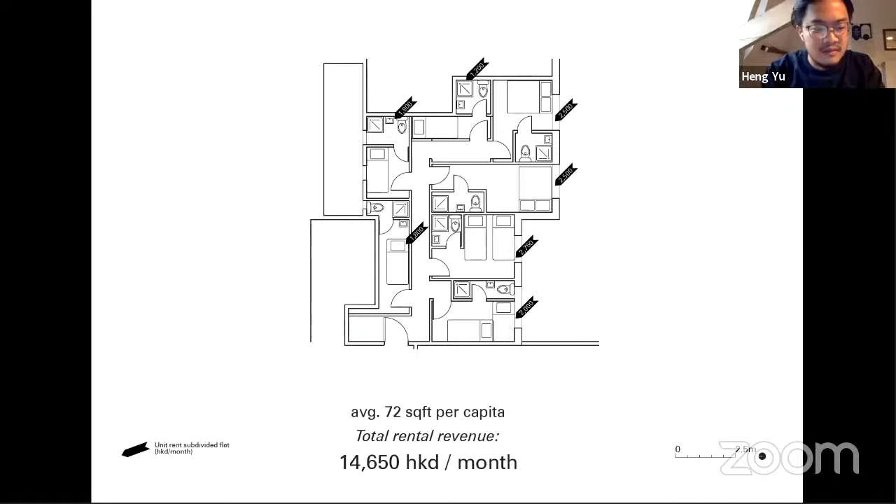Right now, the average area of subdivided flats is 48 square feet. That is smaller than the average area people have in a Hong Kong prison. So I was wondering, what if we keep subdividing our house until it becomes completely uninhabitable and a purely speculative tool, just like the cryptocurrency in our city. So we cannot actually consume it, and its value comes purely from its place and its irreplaceability in the city. Thank you.

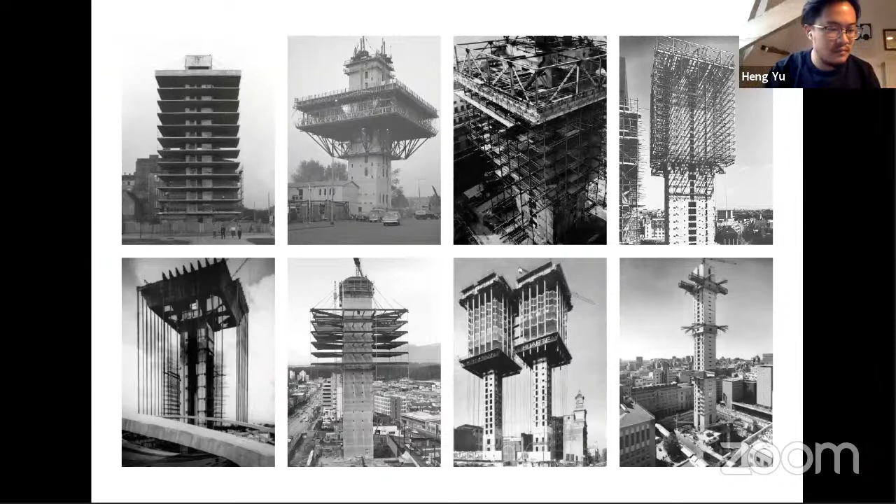We move to the last contribution, called Core and Shell. Core and Shell examines the relationship between finance and the lifespan of suspended towers. These structures appeared in 1963 as part of late modernism and disappeared 10 years later with the oil crisis, after being no longer economically efficient.

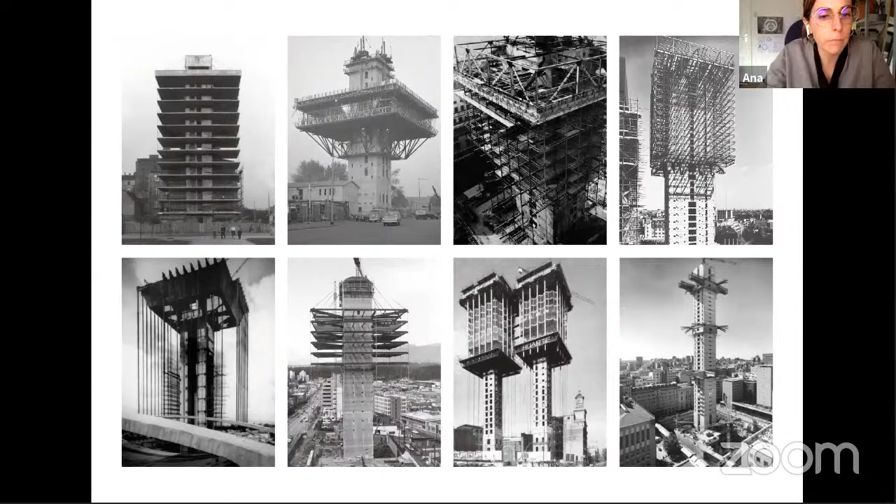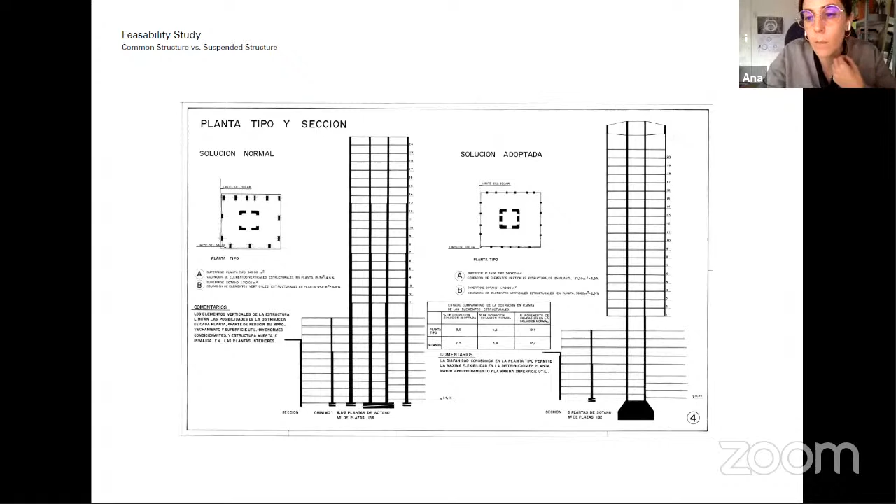To talk about this type, we should also know who were the characters behind these ambitious operations. First, a very outstanding role of the engineer in relation with the architect, and then an important role of the developer, who needed to trust the whole process thanks to feasibility studies that compared the suspended system with the traditional one. As you see in these images related to the case study in Madrid, the type needed to surpass many kinds of financial crises due to its complexity.

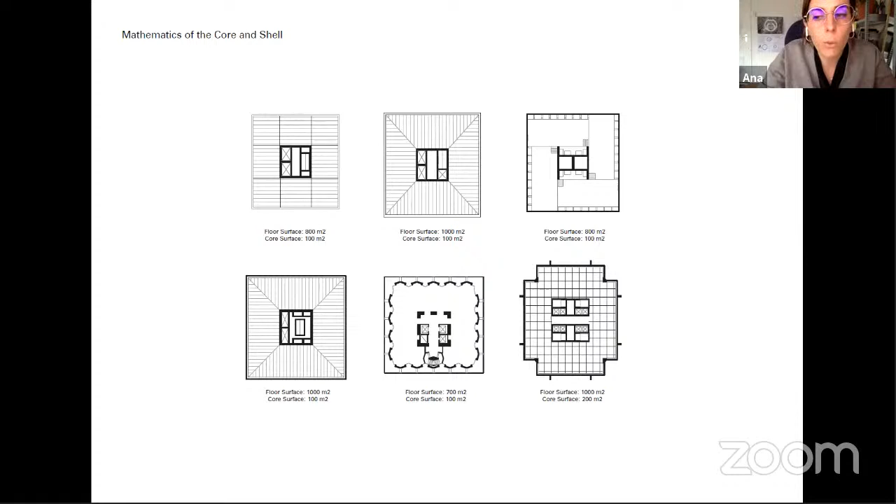When we look at the core in detail and its mathematics, we observe that the geometry and proportions are quite similar through time. But if we go one by one, we can also understand the role of the clients and the evolution of the type in section.

The first example, the Overbeek Tower in Rotterdam, was built for one of the first container companies in the Netherlands. The huge core allowed column-free spaces on the floors and a 2-story car showroom at the underground level.

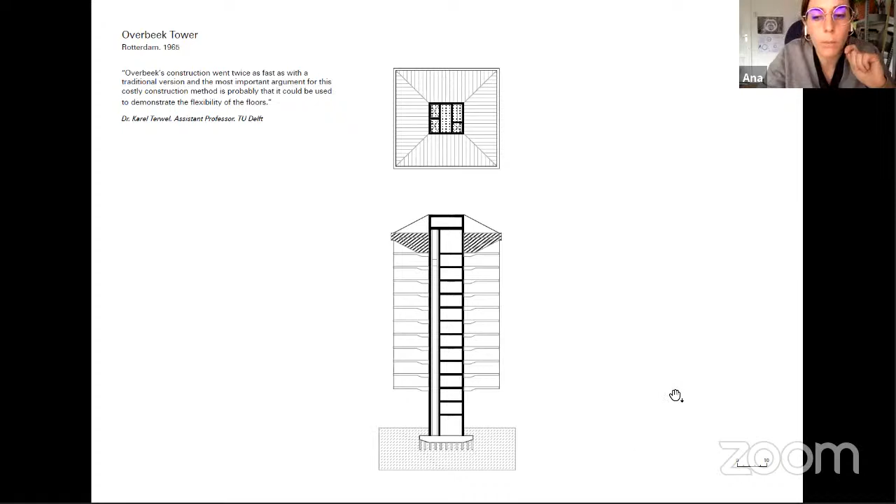When the second example, known as the Celanese Tower, was built, the Mexican Petroleum Institute and in general the oil and petrochemical industry was receiving a great boost. Celanese, an American petrochemical company, is settled in Mexico, and the architect Legorreta is hired to build the tower, which you can see here in the section.

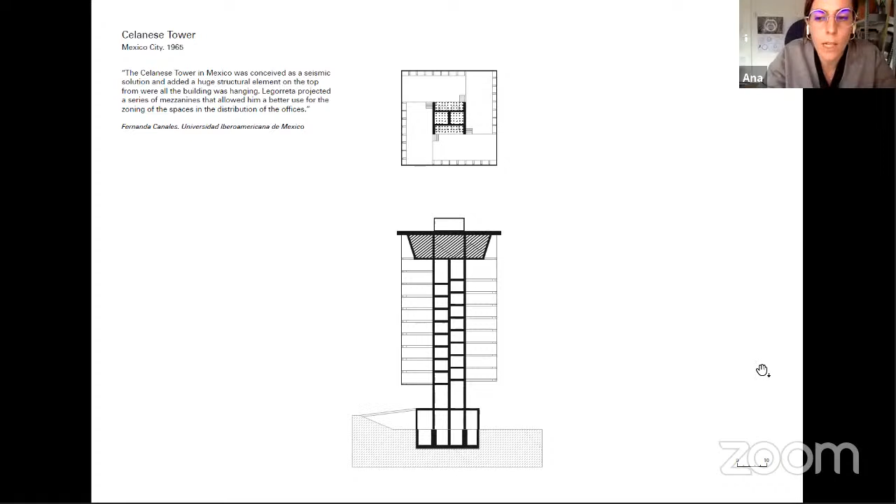The section was conceived as a seismic solution and added a huge structural element on top from where all the building was hanging. Two years later, the West Coast Center is built in Vancouver to incorporate a Canadian company which supplied natural gas to the huge industrial and residential markets in the US.

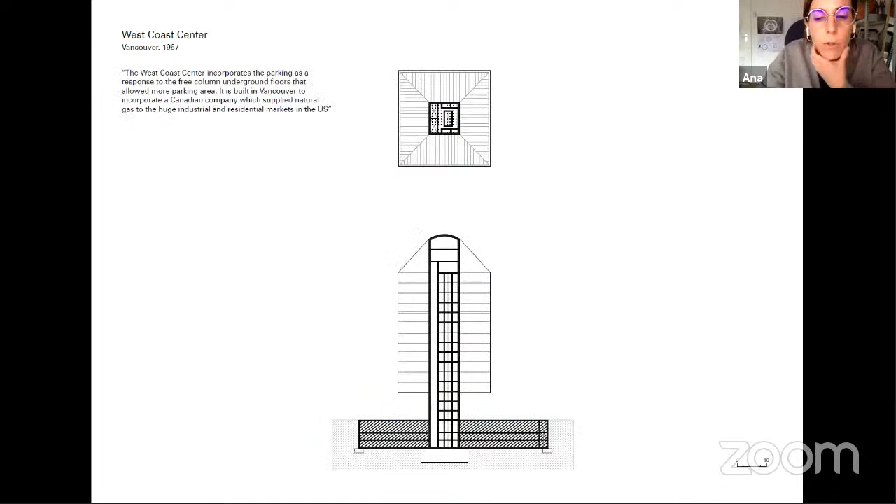And this case is the first one to incorporate the parking as a response to the free-column underground floors. Later, the Colon Towers, with an extravagant disguise, the developer doubles the height from 50 meters to 110 meters and multiplies the size of the parking as a way to show profitability.

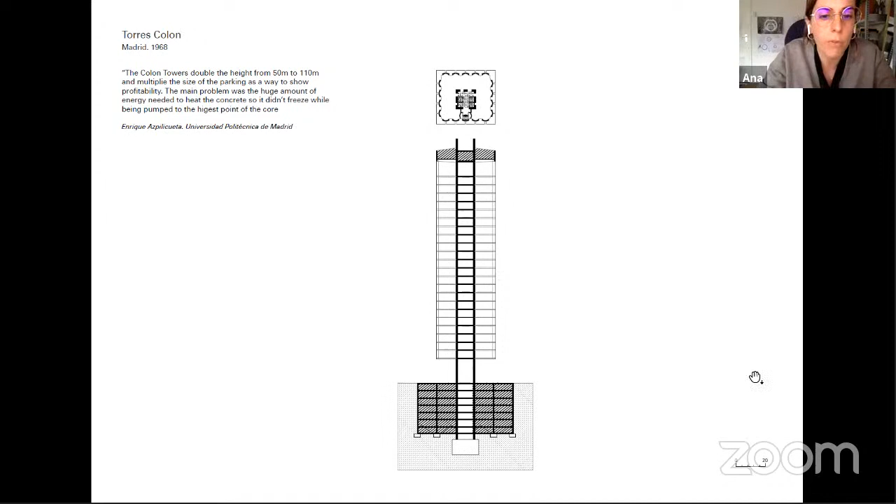And finally, the appearance of the Standard Bank Tower coincides with the growth of the city, thanks to the gold industry, and the type somehow represents the prosperity of the country. In this case, the tower is developed adding prefabricated elements to hang the building 3 times instead of 1.

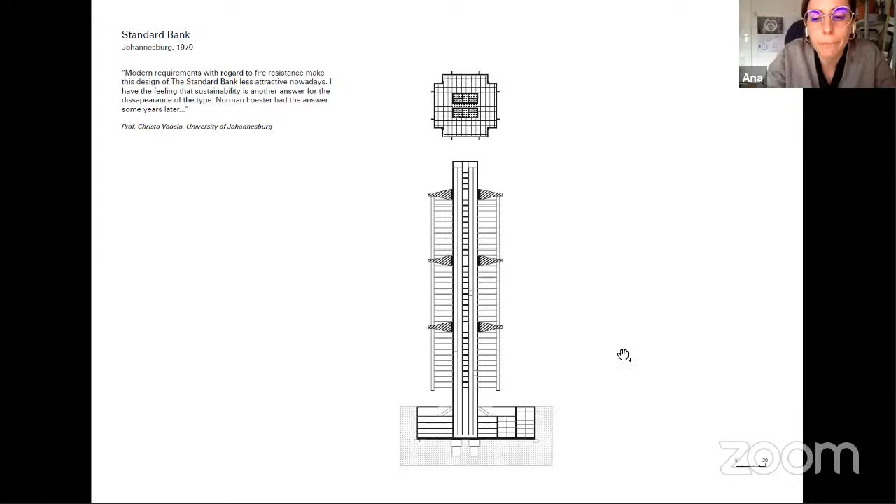What we see in this timeline is that the disappearance of the type coincides with an increase in the price of both gold and oil. After the 70s, the relation between cost and return is no longer compensated. In Spain, the energy cost of pumping and maintaining the concrete hot until the top of the core is extremely expensive. And in Johannesburg, the last example, new fire regulations make it very expensive to use steel cables.

So we know that the type disappears after the oil crisis, but we also know that when Norman Foster studies the suspended towers to develop the Hong Kong HSBC building, he states that the concrete core needs to be in the extremes and not in the center, in order to have a flexible rectangular floor plan and only 2 main orientations which consume less energy.

So as part of the research, a speculative scenario is proposed, and taking into account the trend of building more and more slim towers, the suspended buildings could be resurrected to give a new use to the never-inhabited slim cores. So the question could be: what if a new type emerges from the combination of the old suspended towers and the slim towers as a new financial strategy?